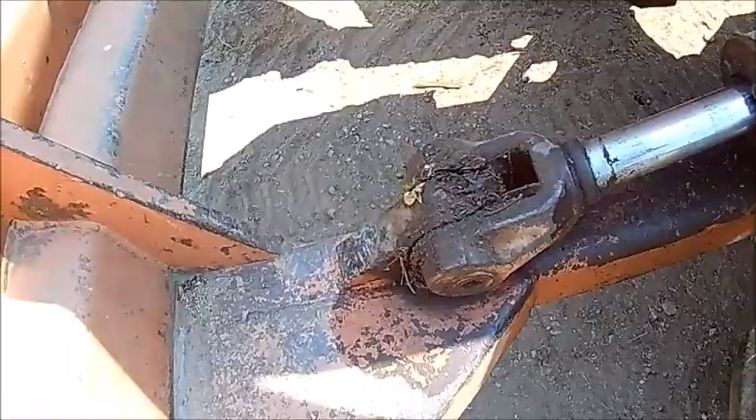Got to fix the blade cylinder leaks, which I wouldn't even think a logger would think that was leaking, but it is. That's a pretty good catch. You can tell it has been leaking, but these are loggers you're dealing with.

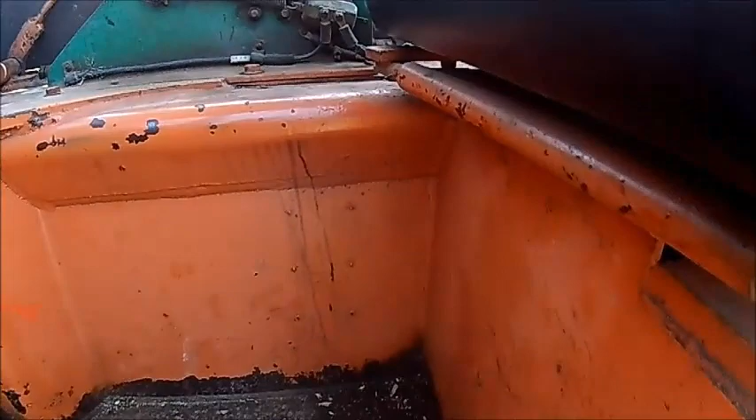353 Detroit. This is, I don't know what year this is. Serial tag is gone. Should be stamped in there, but must be painted over too thick.

But it's an older tractor because it's got the aluminum plates, which are mostly missing because they get smashed off. But it's got all the original badges on it. Later on they went to just decals on there. But it's got the more enclosed cab. The early ones didn't have that, they just had nothing here on both sides. So I don't know what year it is, but it's pretty straight.

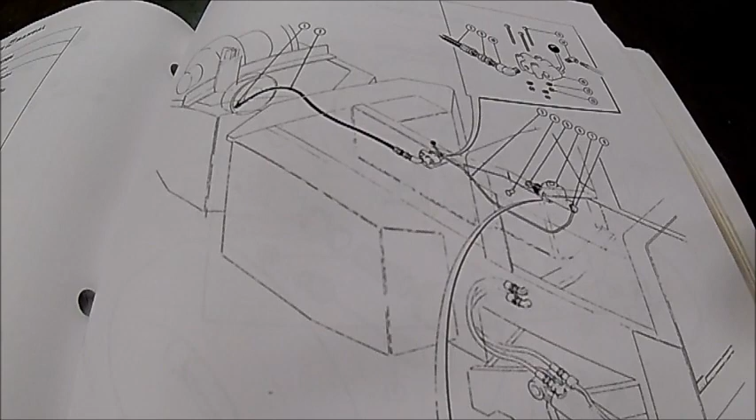Got the manual park brake upgrade that was given away for free. Okay, hopefully you can see this pretty good. But this is the original parking brake, or whatever they call it. I think they call it like a Mico lock brake. I don't know what they call it.

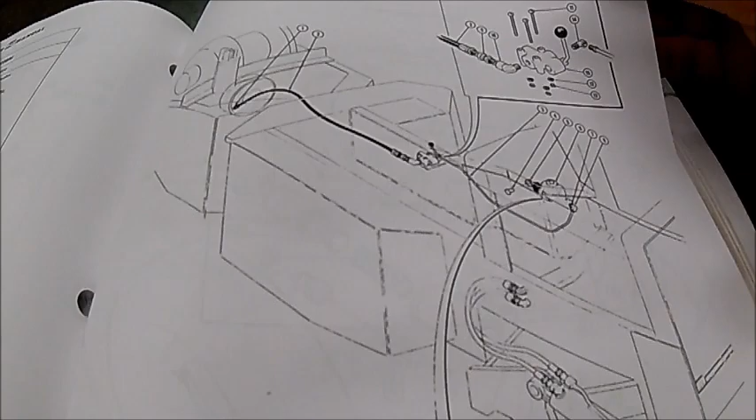But basically there's a little valve here that was in the brake line between the master cylinder and the slave. Basically you would step on the brakes and hold them and set the brakes like normal, then flip this lever, and that would hold pressure between here and the slave cylinder, holding the brakes on. Unless the slave cylinder leaked, or the line leaked, or this thing leaked. So they had a bunch of problems with it, and I think people got killed and hurt, and all the things you could think of that would happen when a parking brake releases when you're not expecting it.

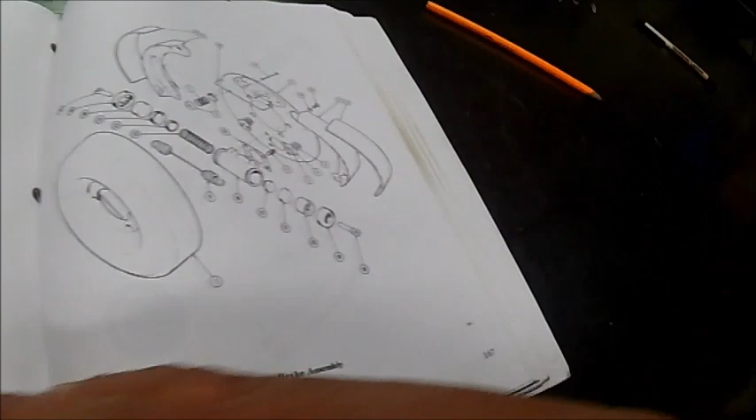There's a little picture of the valve and how it was plumbed up. And then I thought there was a picture of the whole thing. No, that's a picture we just looked at. That's not the picture we looked at. There it is.

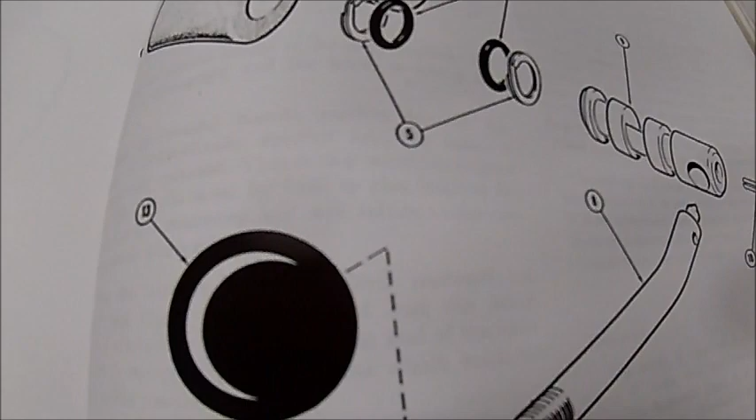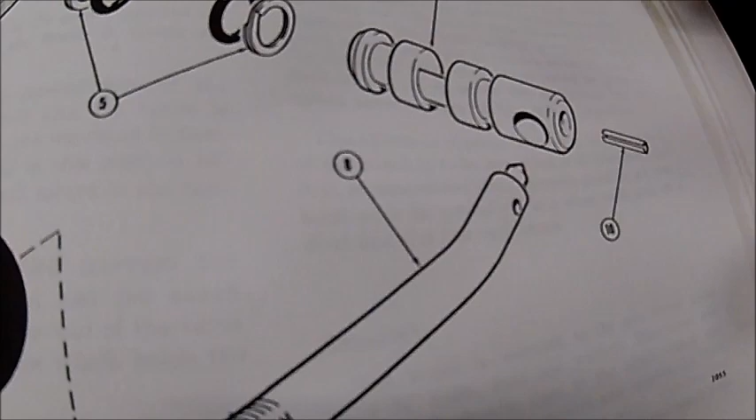It's called a brake valve. So it looks like this little deal here, you rotated that, and that little cutout would shut off the passage by the looks of it, either holding the oil or letting it flow by. So you had a couple little O-rings and a backup ring that was protecting you from dying. Not the mechanical cable brake or nothing like that, but this was just a bad deal.

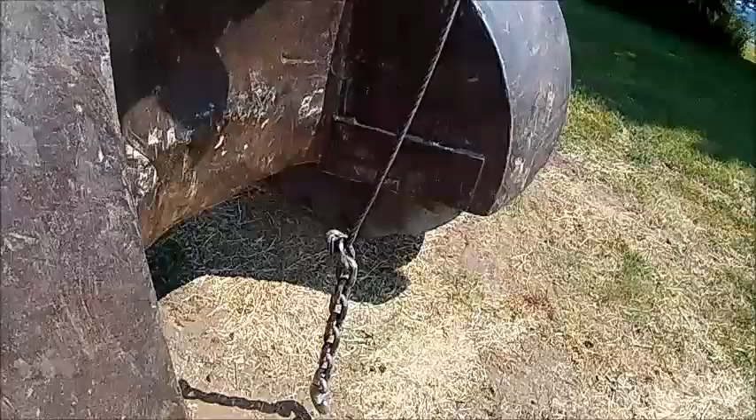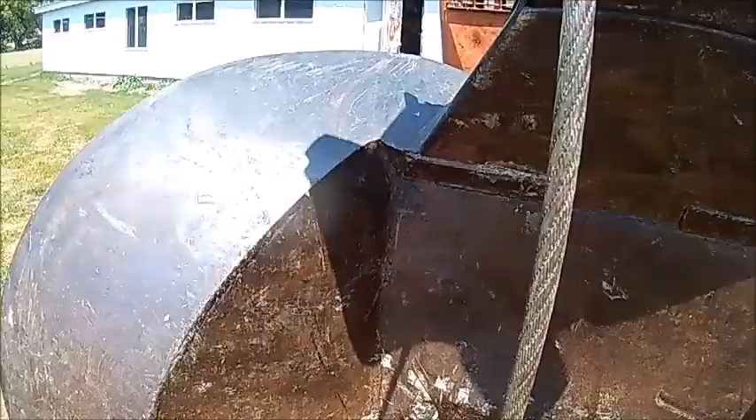It's got the rolled rear fenders that were not original to this machine. The guy that had it before, the jackass that owns it now, added those. And those are kind of nice because they let the logs roll up when you're going around a corner, instead of getting caught up on the tires and wanting to be carried over around on the tires.

A lot of these machines got upgraded with these fenders. You could go over to Lyons Equipment in Little Valley and buy a set of them. They usually had them sitting there. They used to take a lot of 200 series skidders, and they would extend the frames and move the axles out, and then they would get sent out and put bucket lifts and aerial lifts and stuff on them. So you could get these fenders pretty cheap, and it was a great upgrade to these old machines.

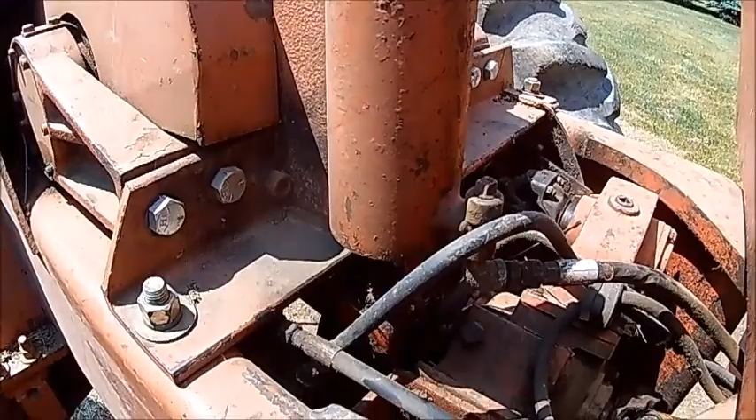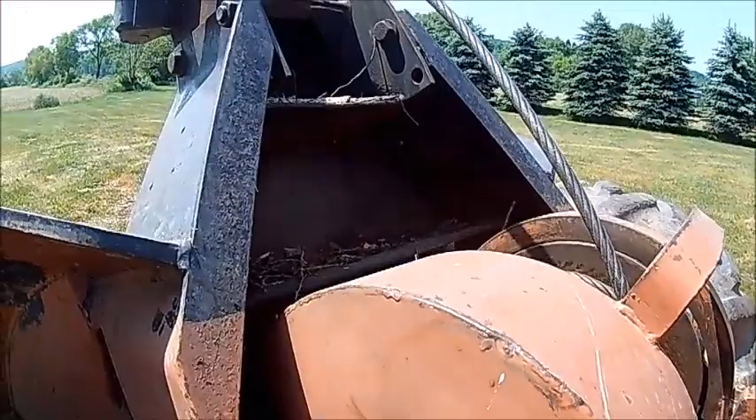This is a winch we fixed earlier this winter, and he says that it does not hold a load sometimes. And he says the heavier the load, the better it holds, or I don't know. He's such a bullshitter, you can't believe the guy, anything he tells you. He claims he's got it adjusted correctly because he knows how to adjust it, which he don't know shit. So I'm assuming he's got it adjusted so it'll free spool, so a girl could pull it out. So probably there's not enough travel for the spring to apply enough pressure on the brake band and it lets it slip. Would be my guess.

But the fuel tank's nice and straight. Usually that's all smashed in from sliding into trees.

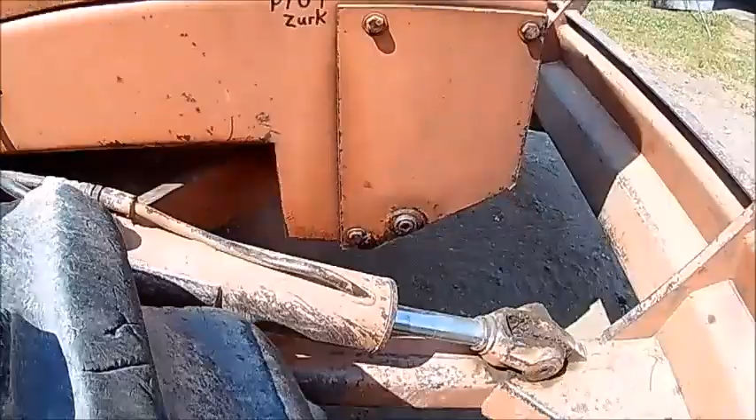Got the zerks on this side. This cylinder doesn't leak, have to get the upholstery guy down here to run it. We'll check the center pins and walking beam pins to see how good they are. See, this is the last time I put filters on it - ooh, a year ago, 6/1 of 22. Way to keep up on stuff. Whatever that is.

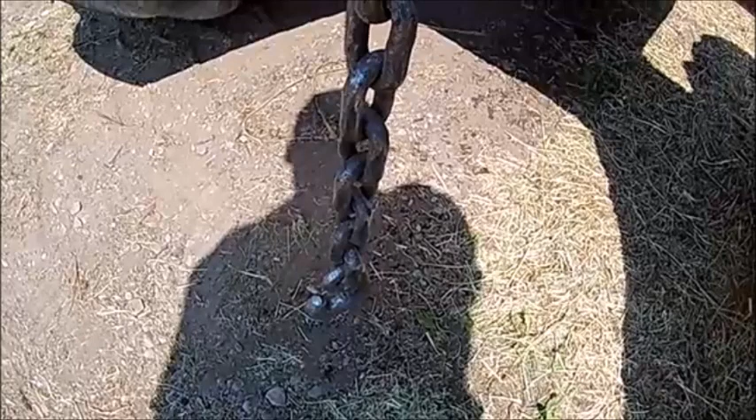Of course, he's got kind of a retard rig in here. Okay, I don't mean to offend any of my 11 viewers if you run this style rigging on your machine, but I'm dealing with a guy that's brain damaged, and the upholstery guy gets me into this stuff, so sometimes I get frustrated and talk kind of ignorantly. I apologize if I offended anyone.

Cuts up old truck springs, coil springs, so you can slide them up here, and then the last one goes on the hook. It keeps the rest of them from sliding off, so you could have basically an unlimited amount of chokers on there. But he's like the only guy I ever see do that. Everybody else has got sliders, but whatever, he's cheap - a slider costs money. You get somebody to make you a ring for nothing.

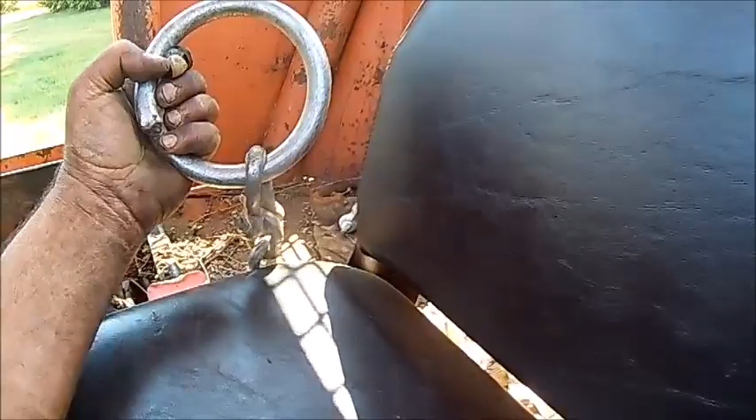Here's the ring I'm talking about. So I think he uses this ring and then a cable slide. I don't know, he does a bunch of stupid shit. He's retarded.

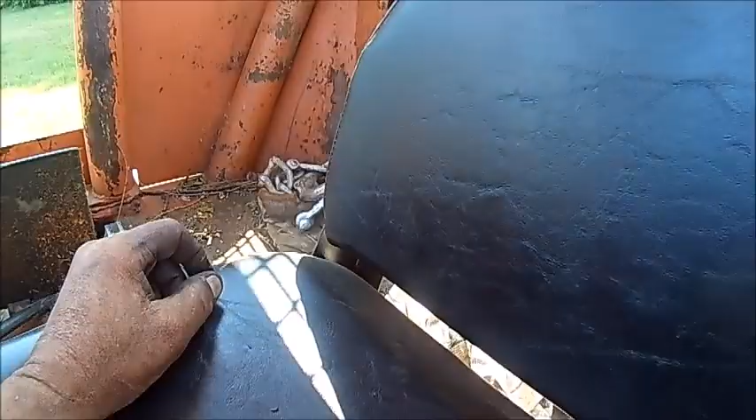So I'll get to working on that. Got a pretty nice seat. The upholstery guy could fix that up for you right there before that goes complete shit. Oh yeah, we got to fix the battery tray too - the battery tray's apparently rusted out.

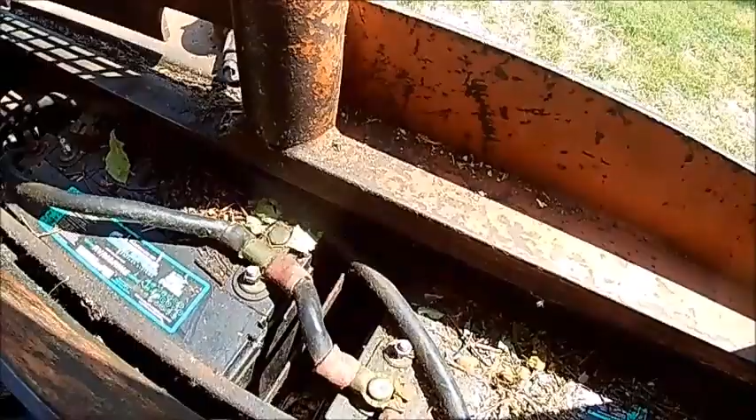Rub it on the drive shaft - I don't think it's anywhere close to the drive shaft, but whatever, we'll fix that too.

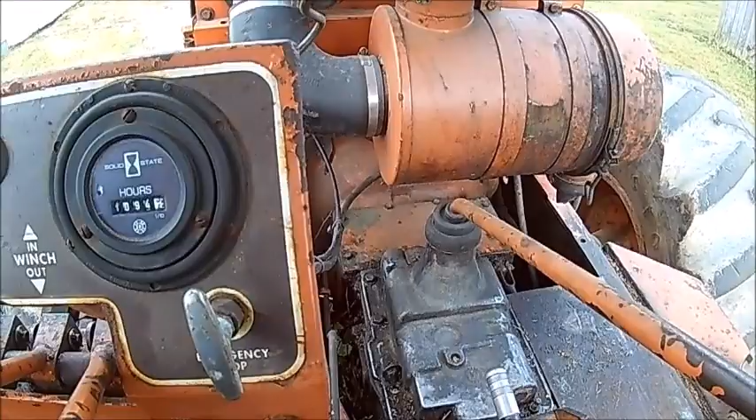Charge you for that. Okay, so one of our first projects here, it's not on our list of stuff to do because that's not the problem, is we got to put a shut-off cable on this. Because the instructions are you put it in fourth gear and stall it to shut it off, because the problem is not with the cable, it's with the governor control, or whatever you want to call it on the engine.

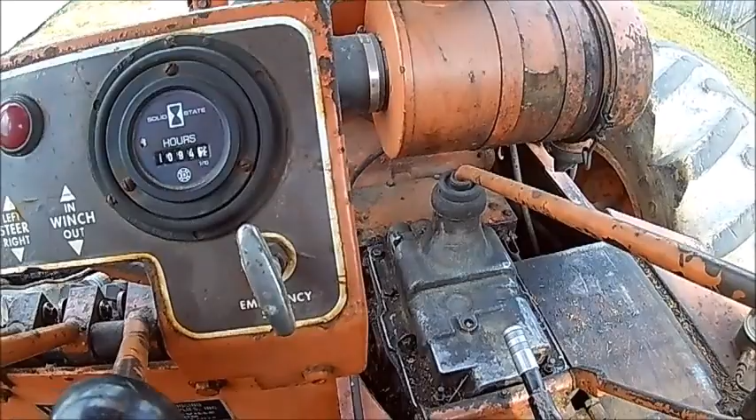Well, me and the upholstery guy, we didn't know the cable was bad. We pulled on the cable, it shut it off, but it worked so hard that I had to hold the cable and he had to pound it back in. But that's not the problem. So we're going to look into that and see what the real problem is. It's not the cable - I'm pretty sure it's the cable, but...

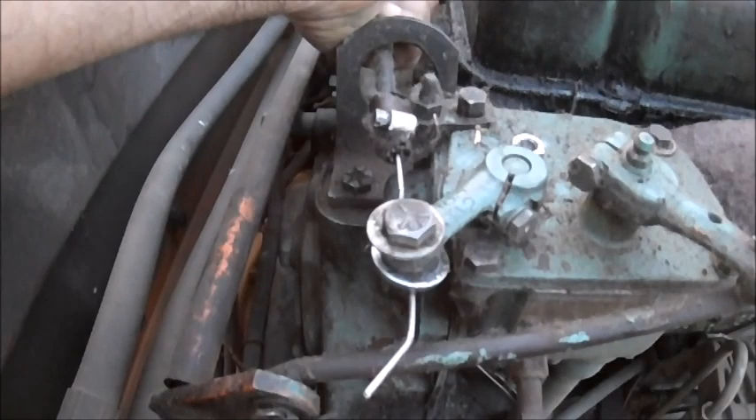Okay, so we got the hoods off of here, we're checking this out, and this looks like it's kind of just jiggling back and forth. Pretty sure that cable is just seized right up. So we're going to unhook it at the shut-off lever, unhook it here, get the cable out of there, and see what's really going on.

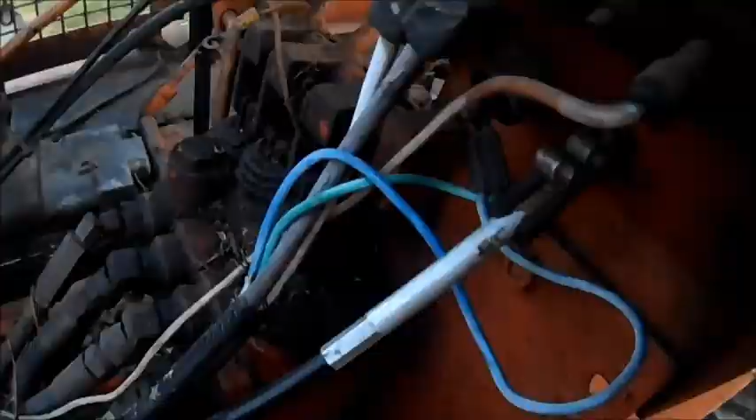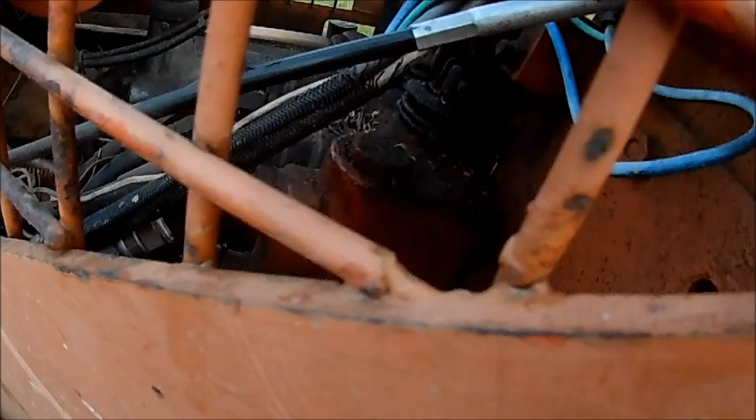Okay, so you can see it up there. I've got the cable unhooked underneath the exhaust. I'll come back here and... oh yeah, the cable's not the problem. It's supposed to work like that. What a dumbass. Okay, we got our fuel shutoff out.

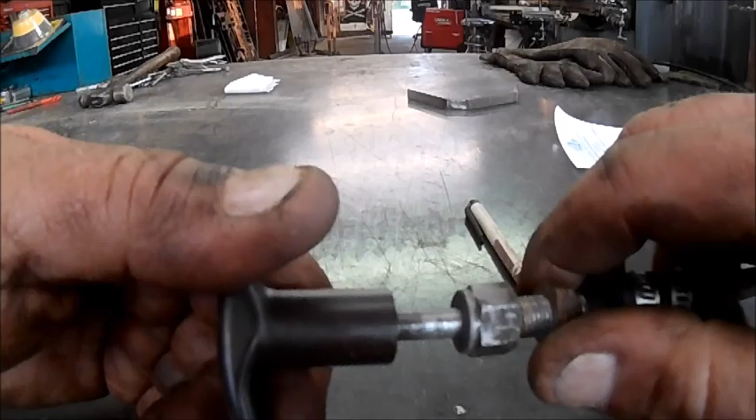Assume this needs to be connected to the cable, and usually they don't come with two hose clamps with a piece of fuel line in between there. And with all that said, it still works really hard. So there's nothing wrong with it. I don't know why we can't reuse that.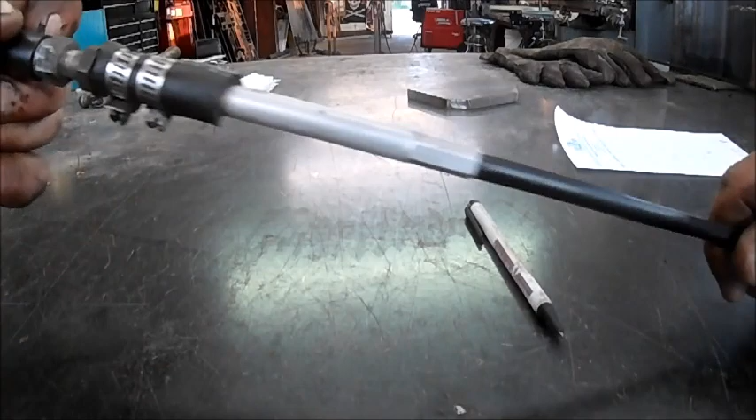And we got our lever assembly out. Tune in next week for lever assembly rebushing.

Okay, we got the cable mounted up here. We had to make a new bracket, or a better bracket. Made a new clip to hold the cable down. Welded a nut underneath there, so it's just a bolt going through there. And then we kind of made up a little bit of a cable clamp there, fixed up a little bit better than what they had.

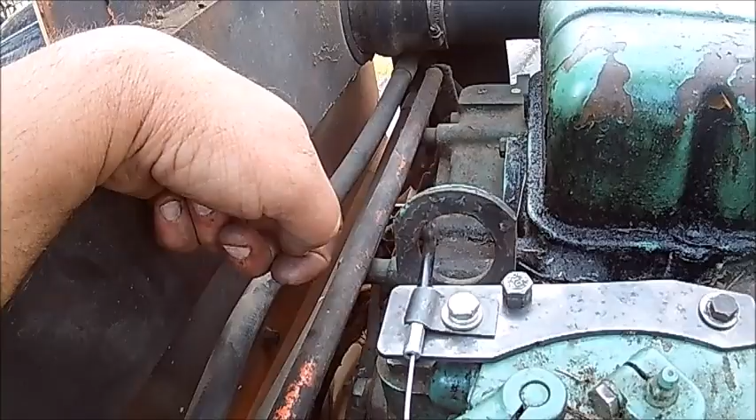May change this - the cable's a little bit too short. May redesign this bracket, maybe gain an inch or two over here, but probably won't do nothing. It works, cable's a little bit short. Should drill a hole through the firewall, put a grommet, but probably won't do nothing.

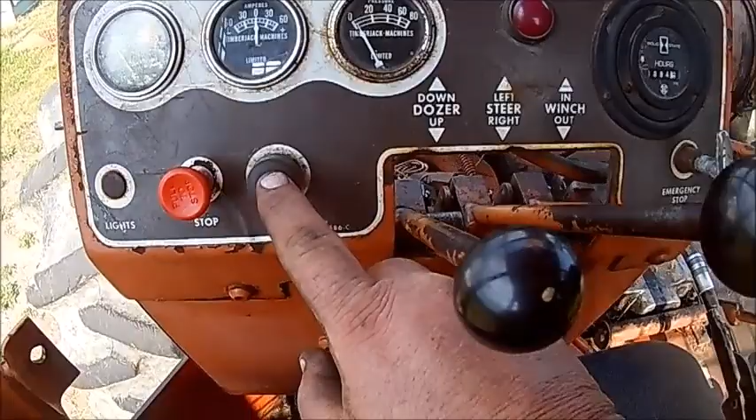Okay, we got the new control in there. Works with a finger. Huh, the starter's going to need to be the next thing we work on.

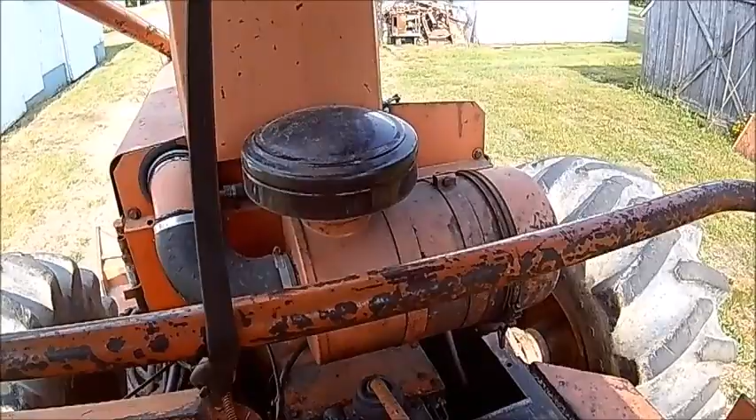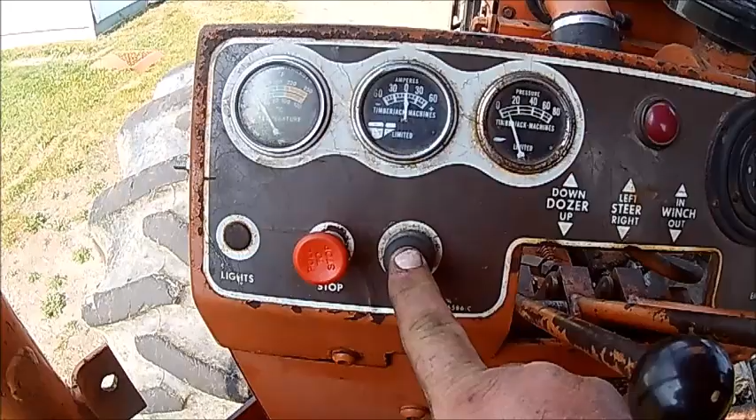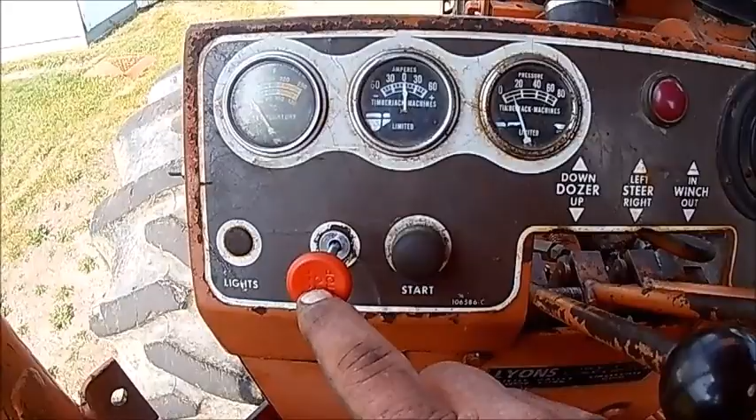Yeah, I really don't think that was the problem. What a jackass. Why do I do this?